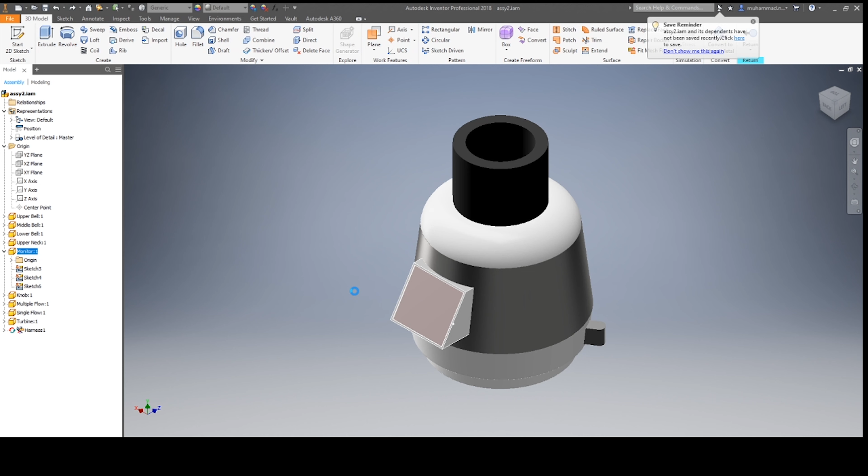It has several features. The first one is this screen monitor. It can inform the user about the water usage level of the faucet this device is connected to. If the screen is black like this, it means the water has not yet surpassed the average or minimum water needed for daily usage. But if the water usage already surpassed that, the screen will turn red like this.

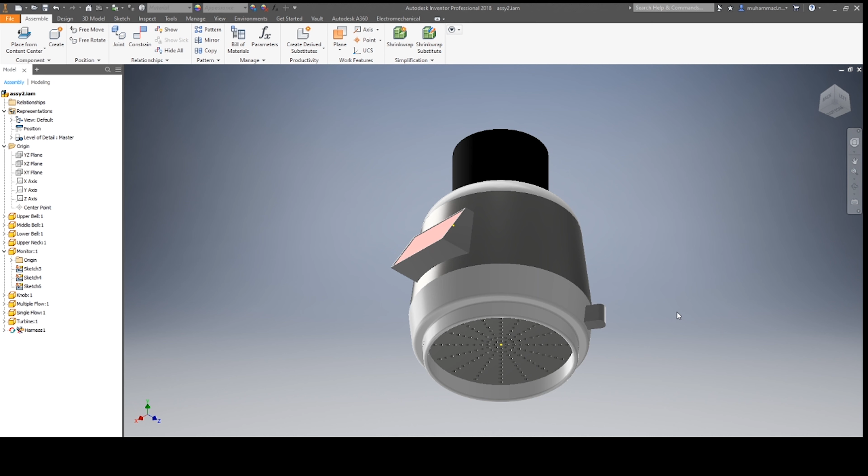The second feature is a multiple output flow or single output flow, which can be chosen by the user by turning the lower part using this knob clockwise or counterclockwise. This is also in accordance with the water saving effort of using this device. You see here this spread multiple output flow nozzle, and there is actually another one inside of it, which is the single output flow. I'll show it shortly.

Now, how it works is actually the same as any other add-on. The water will go from here, the upper neck, which we designed to fit a common faucet in Indonesian households, 19 millimeters in diameter, and the water will go through here. Before it goes to the other end of this product, the water will rotate and wind up this turbine, which will send data to the monitor about the water level usage.

Normally, this device will sit on the multiple flow output, but if the user turns it using the knob I showed earlier, the single output will go down and sit directly above the multiple flow output, closing several holes and only using the center part.

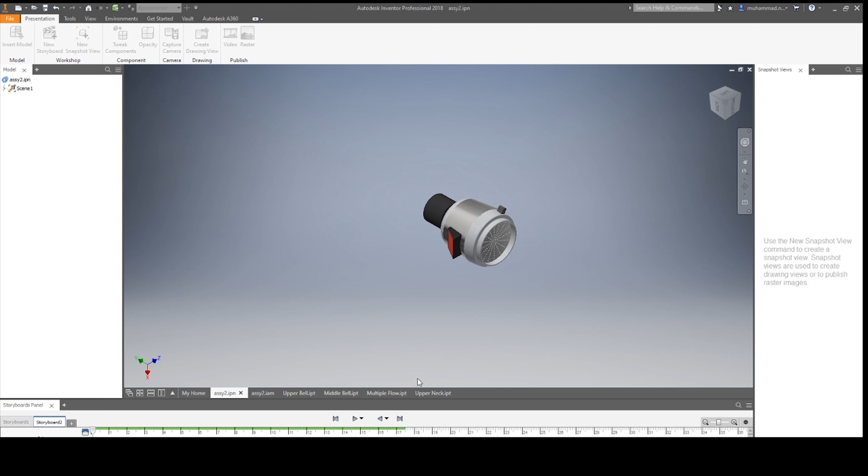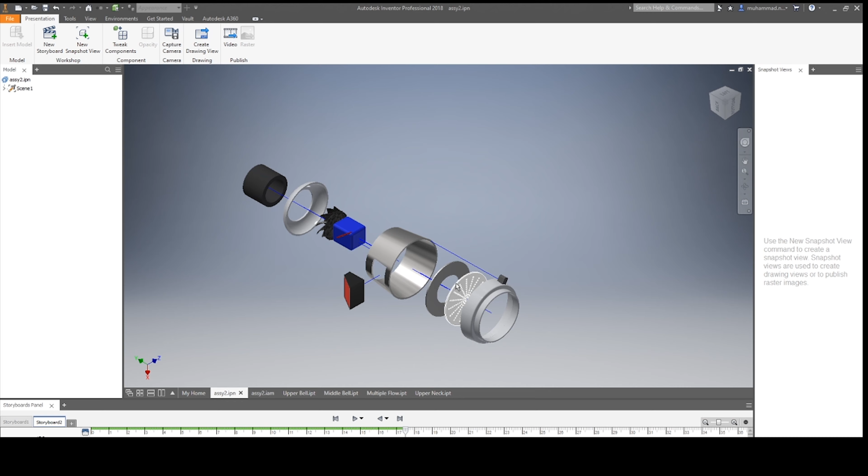Now I will show you the exploded view of this product. So here it is in exploded view. We have the upper neck, and this part is the housing for the product. We have the turbine that I've already mentioned, and this is the multiple flow. The way it actually works is pretty simple - when the user turns it and chooses the single output, it goes down and closes several holes of the multiple output, only using the center like that.

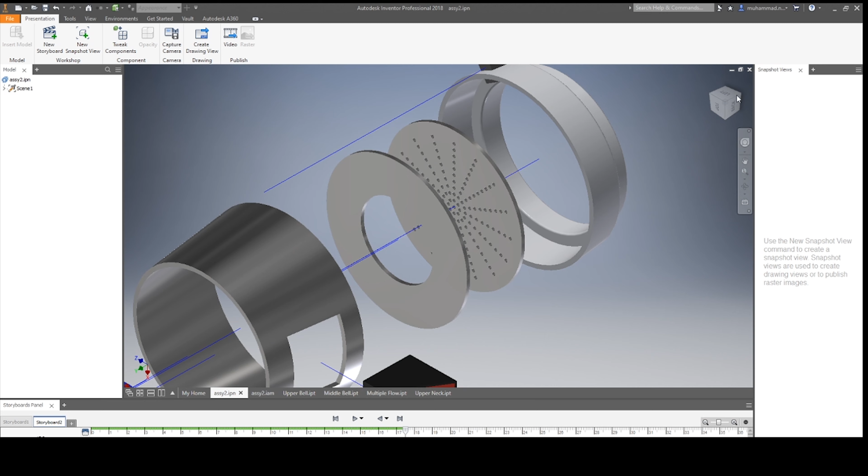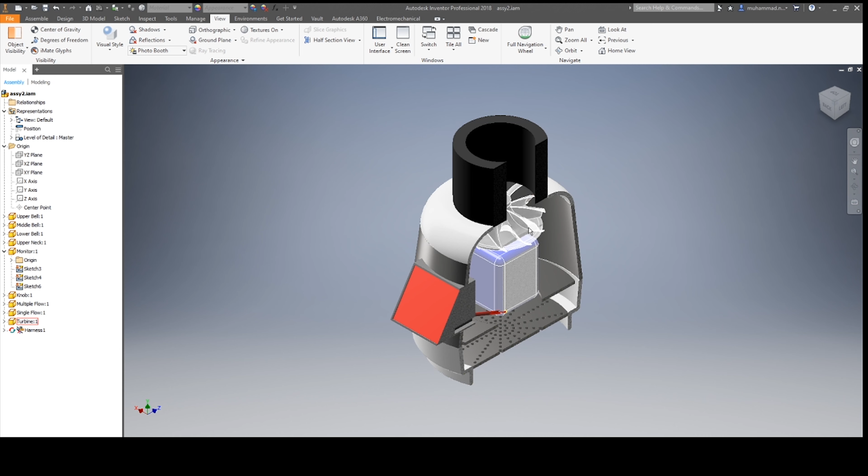For the volume calculation, we know the surface area of this turbine, and we also have the rotations per minute of this turbine that will send data to the monitor, and it will calculate the volume used by this particular faucet. If it's already above 70 liters, the LEDs will turn on and show red.

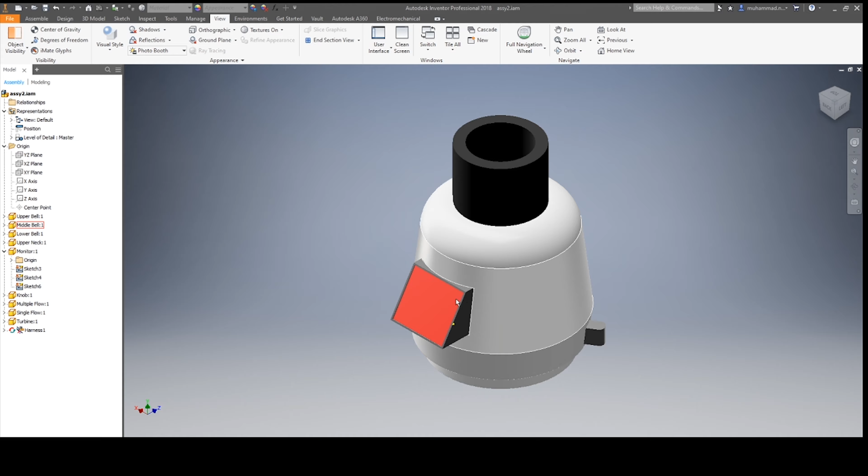Also, based on our conjoint analysis, it showed that the combination of white glossy finish with the accent of gray metallic and also the red LED is the most favorable for our customer.

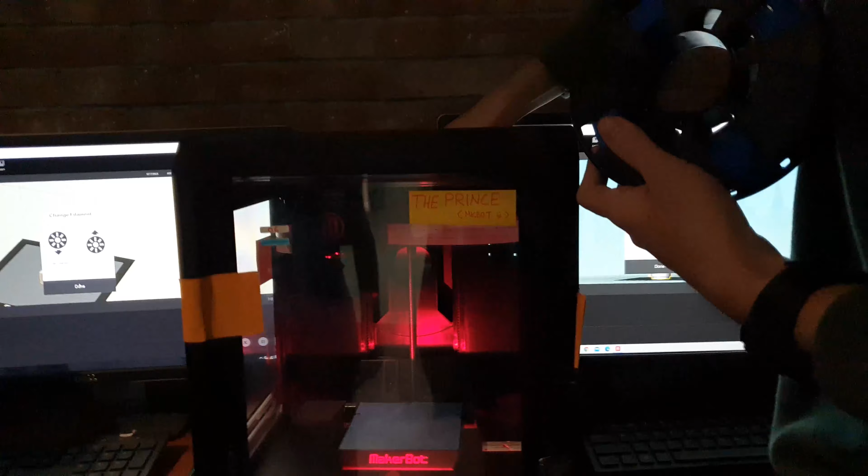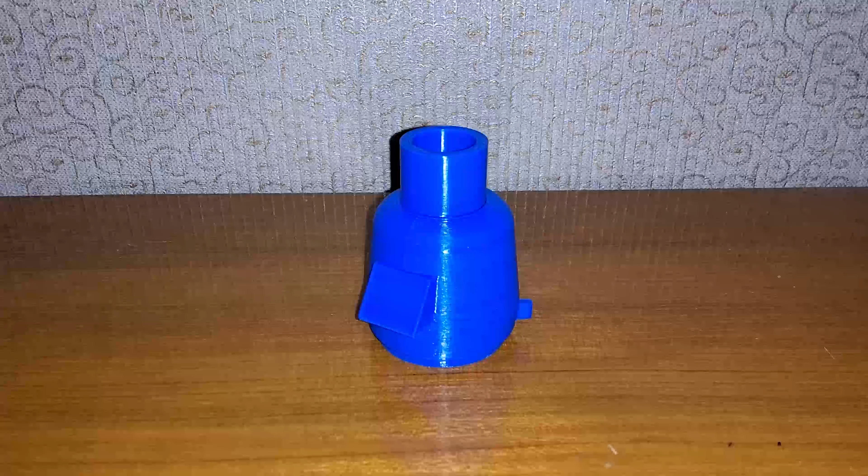Okay, this is the result of the 3D printing prototype of our product, the D-Light water faucet add-on. As we can see here, this is the result of the 3D printing. This printing itself is a scaled down version of our actual product.

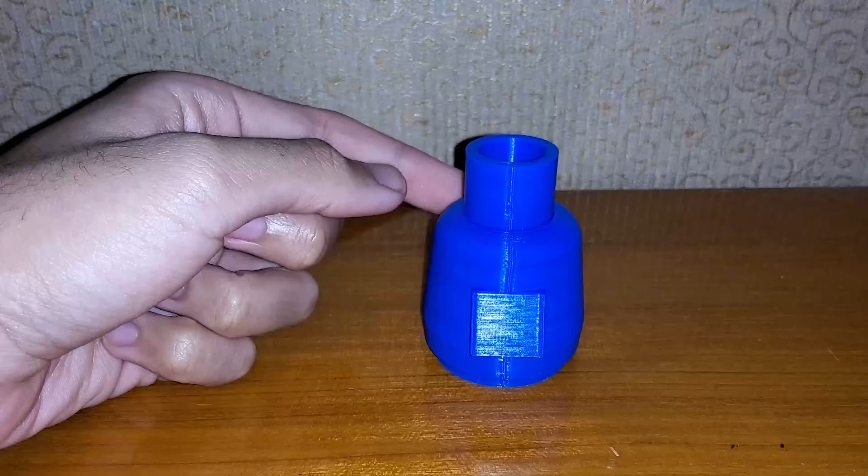As we can see here, on the top we have the rubber upper neck. This is for connecting our product to the faucets of Indonesian home users. We designed the faucet so the material will be flexible and can be used in many different faucet sizes. Here in the front, we can see the LED monitor that will show the user the water usage of their faucet.

So how the LED monitor works is when water flows down from the faucet into the product, inside there will be a turbine that rotates, and after a certain amount of rotations, the turbine will send an electric signal into the LED monitor and it will turn on, giving users the signal that they have used too much water. The LED monitor itself will be powered by the small electricity produced by the turbine inside the product.

And here on the right, we have the nozzle selection knob. In our product, there are two types of nozzles on the bottom - the large nozzle and the small nozzle. The large nozzle will produce a large water outflow, while the small nozzle will produce a smaller, more focused outflow. So we designed the knob so users can interact with it and choose whether they want the water outflow to be big or small.

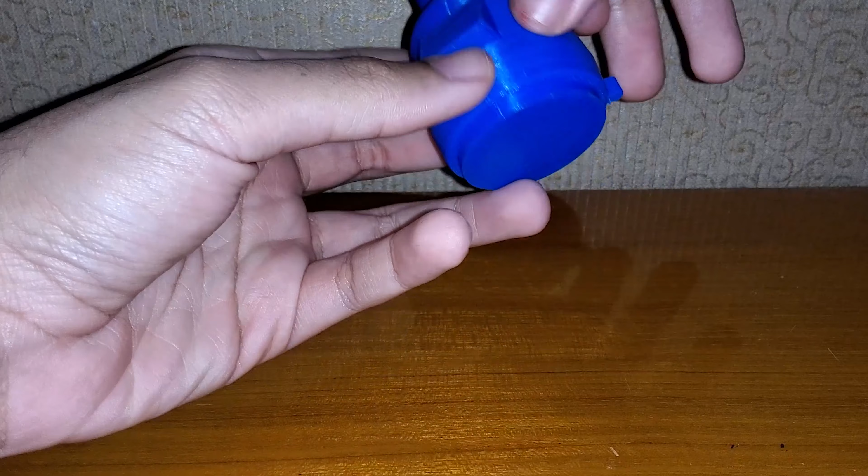As we can see here, the 360-degree view of the product, this is the top where there's the hole where the water comes in, and on the bottom it has the different types of holes and the nozzle itself, where the water will flow out.

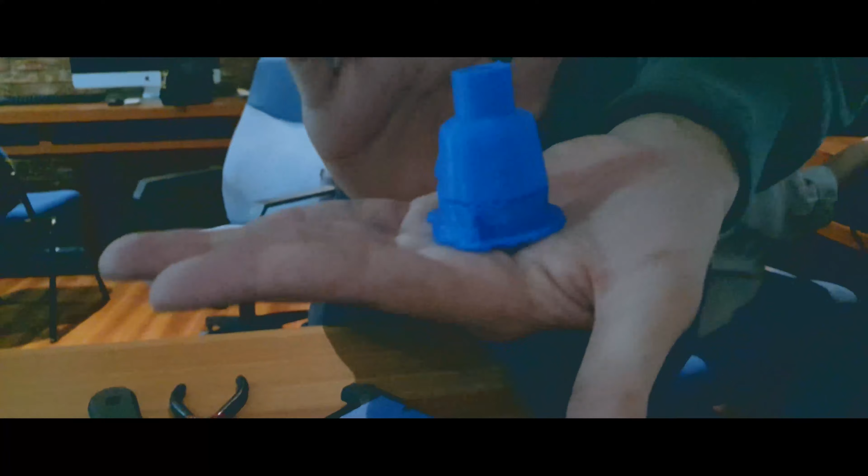So now we are on to the conclusion. Our product, the D-Light Water Faucet Add-on, can monitor the water usage level of a particular faucet in urban households. It has a monitor that warns people if the water surpasses the average water usage, and it also has unique output flows. As shown in the video, we use Autodesk Inventor to make the 3D model of our product.

The 3D model that we designed in the Autodesk software will then be printed using a MakerBot Replicator in the Industrial Engineering Lab. So I will elaborate more about the 3D printing process.

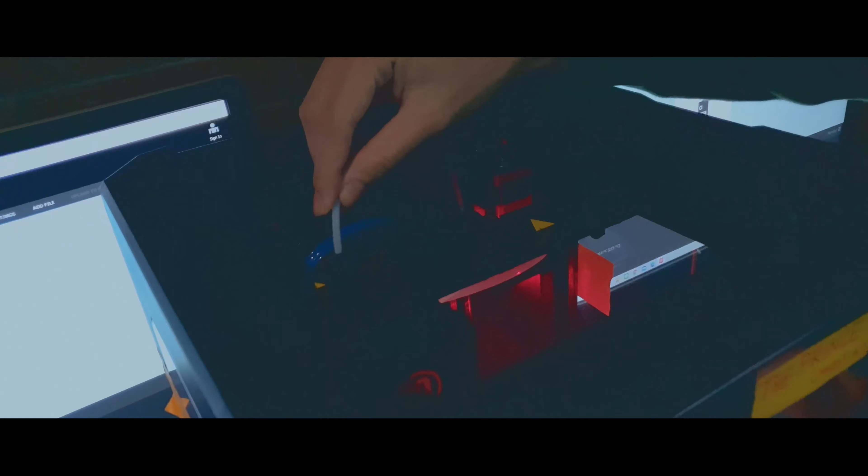In the 3D printing process itself, first we load the blue filament into the 3D printer, which then will be preheated. The prototype of the D-Light water faucet add-on used blue filament, which is easy to use, provides precise results, and is aesthetically pleasing to see.

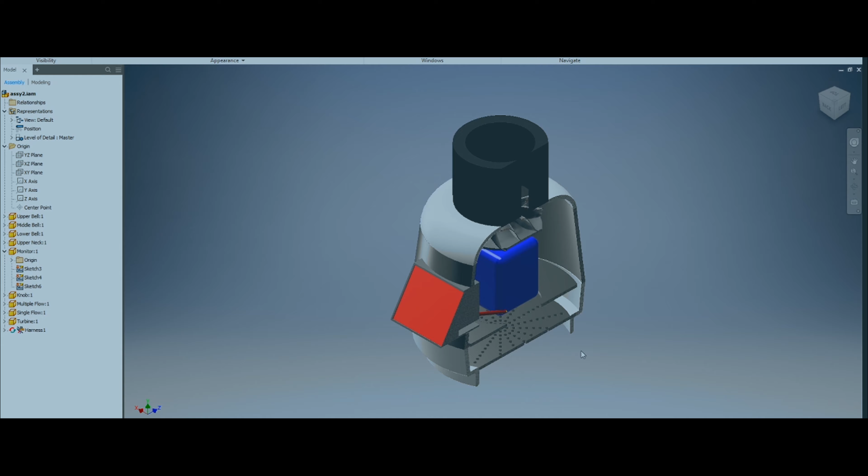After loading the blue filament, we load our product's 3D model, which we made in the Autodesk software, into the MakerBot to fit the size and scale, and also estimate the time it takes for the printing process. The D-Light water faucet add-on prototype has 4 cm in diameter. The 3D printer takes about 2 hours to finish the printing process.

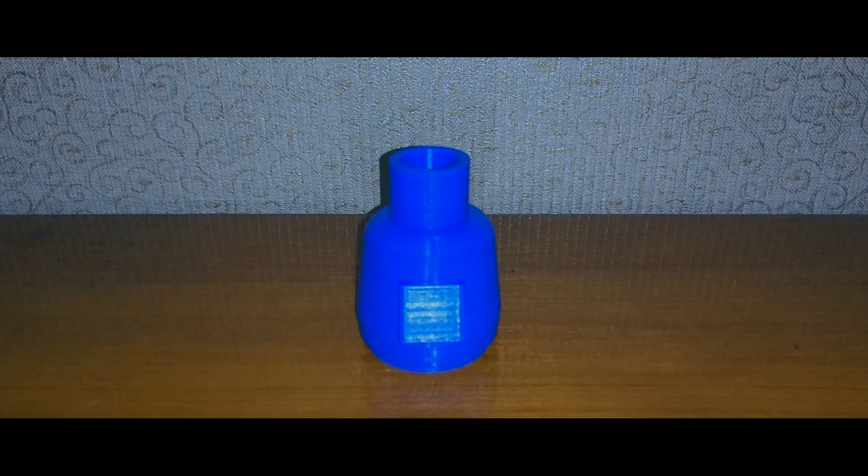We also saw in the video that after the 3D printing process, the base plate of the prototype is removed using a scalpel, and the support is also removed using pliers. So that's the conclusion about the 3D printing process of our product, the D-Light Water Faucet add-on. Thank you.